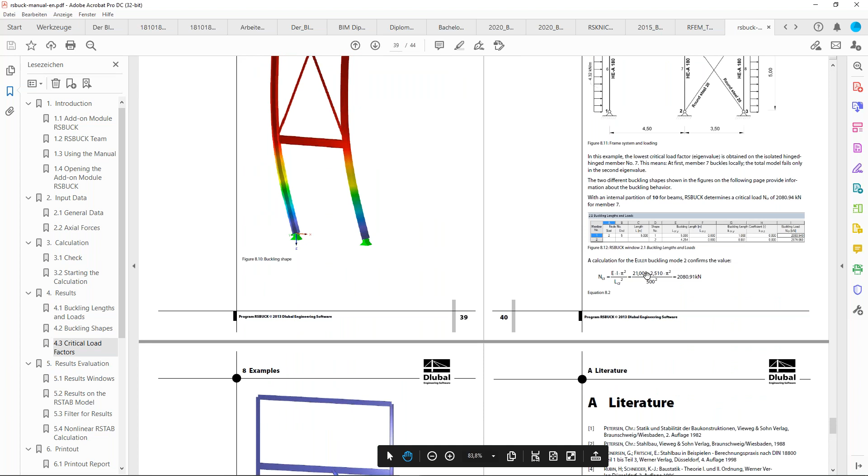2D frame. And because it's a 2D frame, I decide also to do that type of model in 2D XZ, because I just want to activate vertical and horizontal forces in one plane, and also only one moment, in this case, and only vertical and horizontal deformation, and no deformation out of the plane. This is important for that type of model.

You can here decide also to change the project folder. I decide here to take downloads because then I know where it is. You can change it, of course, or you can create a new project. It's up to you. And we don't need any classification of load cases and combinations. This is important for the next example we do one hour later.

My positive orientation of the global z-axis is downward. And especially for you as international attendees, I can recommend you also open these units and decimal places. If we have someone from the American States, you can change here also the units, maybe from lengths to inches, feet, yards, and so on. This is maybe interesting to know.

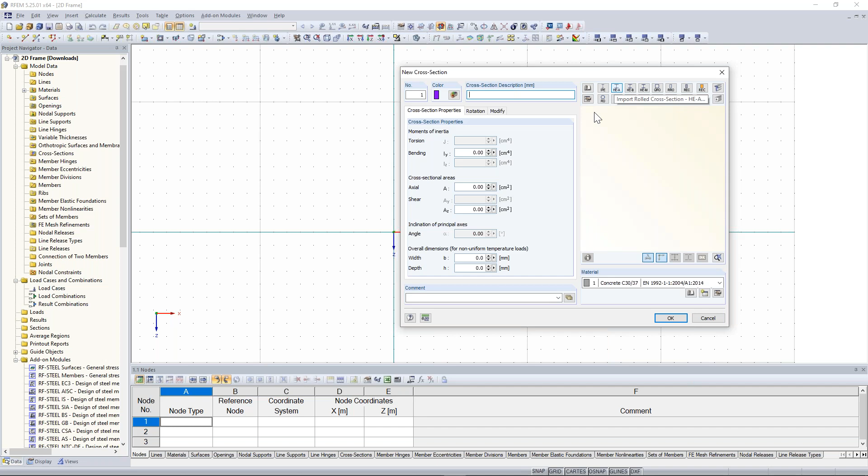Now let us create a new cross section, in this case an HEA 180. It's a very common used profile here in Europe, especially here in Germany. So click here on create new cross section for member start. And here you can see the most used and common used cross sections for steel. So I click here on HEA 180. Material is here, in this case, steel S235.

When somebody doesn't see it, no problem. You can easily add it here in the material or create a new material. For instance, like here, I create a new material, import from my material library. I set my filters for the metal, steel, and according to the standard, in this case, I decide for the Eurocode standard. And yeah, of course, steel S235. What does it mean? We have a yield strength of 23.5 kilonewton per square centimeter.

I click here on OK. Or I can also click here on cancel because my material is already chosen correctly. So I can click here on OK. Again on OK, OK. And now I click here from the beginning.

And I have also to activate snap to grids. Yeah, this wasn't activated now, so I have activated it. And then I draw my column 9 meters high. So the Z coordinate is -9. And with a right click, I close this function.

Okay, now another way of inserting this column, also on the right side, because we have the next column with a distance of 8 meters. So I click here on new single member again. The already created cross-section in RFEM, remember, and then just click here on OK. Within a distance of x equals 8 meters, we create the right column.

Just click here on this grid. And then I want to show you another option of inserting this column, or member in this case: you don't have to set here your column to the height of 9 meters. You can also choose another grid, and vertical to that, you can enter now the length, in this case 9 meters. You see it now on the right window, and then just press the enter or return button and the column will be there.

Okay, nice. Next step is creating here this upper girder. So therefore we create again a new cross section. So click here on new single member, click here again on create new cross section, and click here on IPE 270.

I choose here this one. Materials remains the same. Click here on OK, again on OK. And then draw it from left to the right side. Okay, so upper girder is finished.

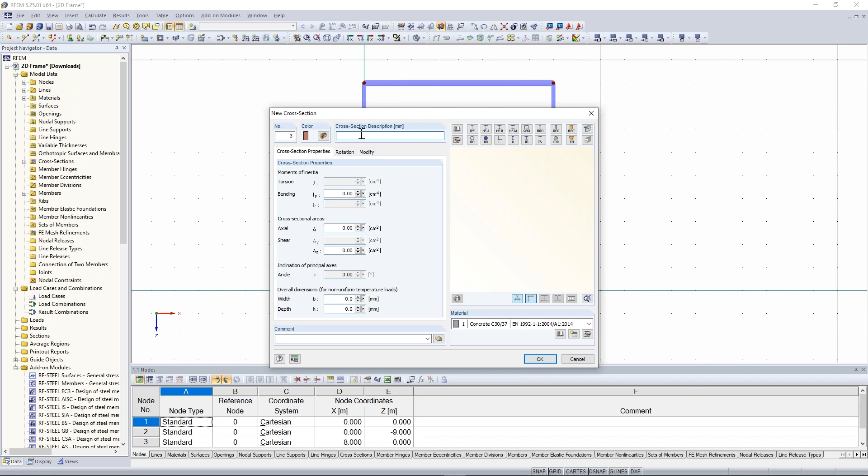And now I can also type here any cross-section description. In this case, I type here IPE 360, and the program recognizes this automatically. The only thing you have to do is change the material from concrete to steel.

I click here on OK. Now you can see here, when you open the tree structure, you can see the created cross-section, IPE 360. And this is now blue. When you see something in the data navigator in blue, this means that this object isn't used so far. In this case, we've created this cross-section, but no member has implemented it yet.

Here in the middle, we want to create this middle girder at the height of 5 meters. So now we divide this member at the height of 5 meters. Right click on the column, go to divide member. Now I have the possibility to divide any member with 3 options: graphically, intermediate nodes, or by distance. In this case, I choose distance.

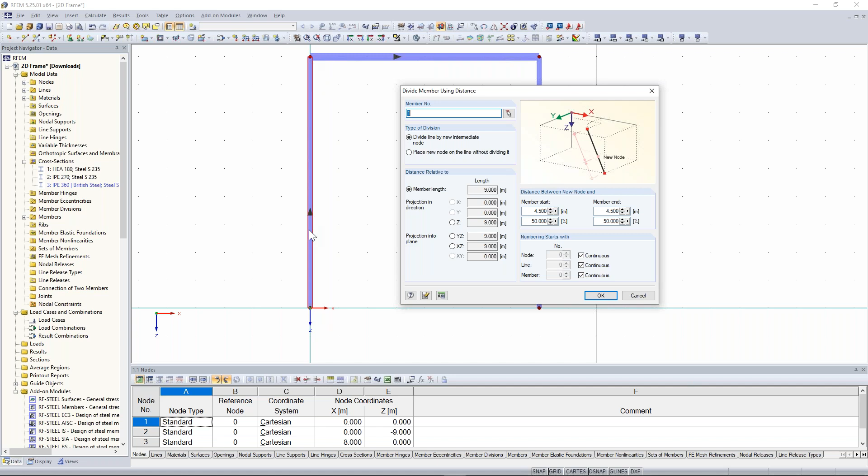Now you see here the different arrows, and these arrows tell me that the starting node is here from down to upwards. And for the upper girder, for example, the starting node is on the left side, and the end node is on the right side. This is important to know where to divide your member.

So in this case, I go from the bottom, 5 meters high. I decide: member start, 5 meters. So it will divide my member here at the height of 5 meters. I click on OK, and this member was divided.

Now, because we have this connection point, we can draw our middle girder here. Again, I do new single member. Because we have already created this new cross section, I only change my member start to IPE 360. I click on OK, draw my middle beam from the left to the right side, perpendicular to my right column, and click OK. This was it. Good.

The next step is creating this vertical column here, and this is a hinge column. Again, I click on this member, right click, and say divide member, graphically in this case. Now I can decide which step I want to have. In this case, I decide 0.5.

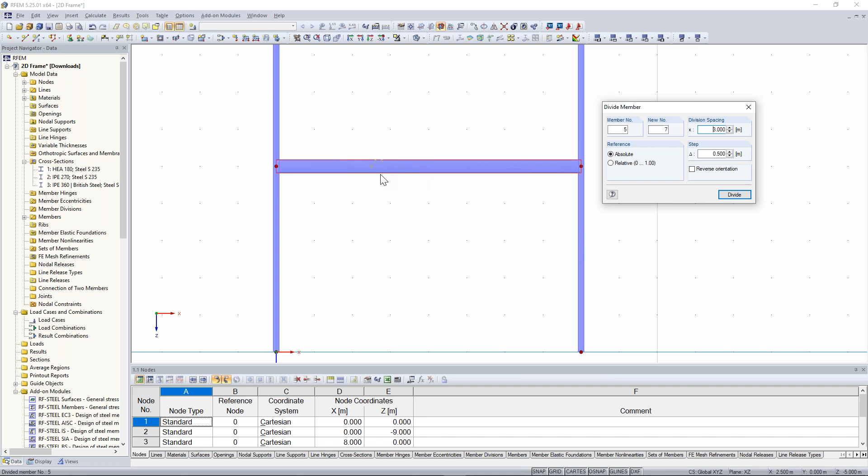Independent of the chosen member, I can divide any member, as you can see here. I can divide this upper beam, the left beam, the right column here, or this one. When I move a little bit along this member, I can see the division spacing change, and we want to divide this at the length of 4.5 meters.

I click here on OK, and this was it. Right click or escape. I close this dialog and I've divided this member and get a new node.

Now my most favorite function of RFEM is copying via drag and drop. Note this and remember it when you work with RFEM — use this function. This makes your life really easier.

Just select it, select the left column. I draw a selection window, in this case from the right to the left upper corner, so everything within this selection is selected. Then press the Control key on your keyboard, hold the left mouse click, drag from the left to the right here to the new node and release, and you have created this new column here.

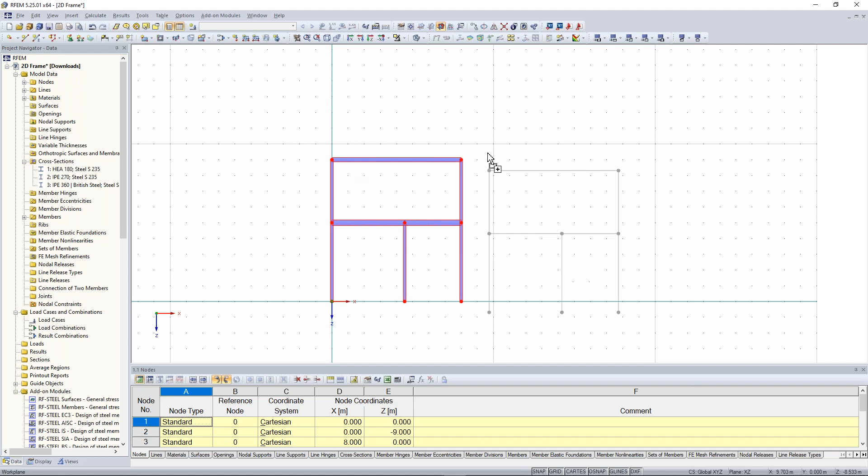Just select everything here — you don't have to do it. Press the Control key, click here on the left corner node, and then just easy, simple copying. It's so easy. It makes your life really easy and makes it fun.

I'll make it undo. Just click the Control key and Z, or here also in the symbol bar, the undo button.

Now the next step is to create the bracing. In order to make it stable and guarantee stability here, because we will add some hinges, I will do this bracing. The bracing has nonlinearities, which means we will activate only tension forces in these member types. First I will create this bracing and then explain it to you afterwards.

In order to create these bracings, we have a very nice function on Tools. At the menu bar, you can call up Tools, then go to Generate Models, Members, because we want to create members. Bracing are members. Bracing in cells.

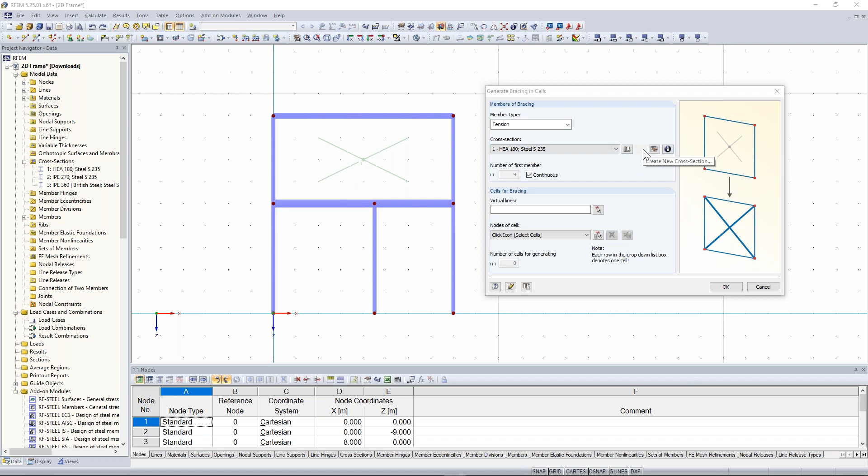Now I have to choose the right cross section. Of course we have just a small diameter of 20 millimeters, so I create a new cross section here. Take this round or import rolled cross section. I do this one, RD20, so 20 millimeters. Click on OK.

Now you see here on the frame this cross, but only for the upper cell or field. This is also only the field I can choose for creating my bracing in cells. The other one at the bottom, I can't choose because they aren't closed.

So in order to close or create a cell, we have the possibility to create a virtual line. Just select virtual line in order to close this right field or right cell. I click on OK, and then we get a new cross.

Now we can create the bracing there. Just select cells, I click here, this cell. I click on OK, again on OK, and we get a new cell. Okay, so much to the modeling.

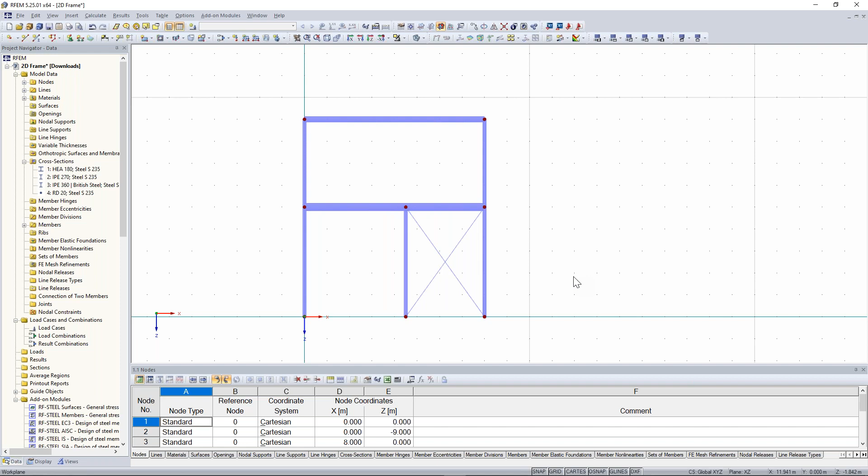Is it possible to get a frame from DXF? Yeah, this is possible. You have different options to import anything. First of all, here import, at the menu bar, File, Import. You can see all supported interfaces, and also the DXF file. And if you want to have it as a background, you can also use guide objects, visual objects, and here background layers, where you can enter any DXF files. Yeah, for example, this is possible.

And the other question was, do you use Ctrl+P or Ctrl+C to copy? I use Ctrl+C to copy. Yeah.

Okay good, let's continue. I guess sometimes, because I noticed it and thought maybe it's only my internet problem, but apparently it's not. Sometimes we don't really see what you're doing, and your voice says things we don't see, so there was someone who noticed a bit of a speed problem. If that happens again, I'll let you know, but so far it doesn't seem to be a huge issue. Okay, sorry for that, I'm really sorry, I don't know how to deal with that. You have to know, in Germany we don't have the fastest internet connections. We are sorry for that, but it doesn't matter - you will get the recording, and in the recording my audio is equal to the sequences you see as videos, so you can watch it afterwards and everything is fine, I think.

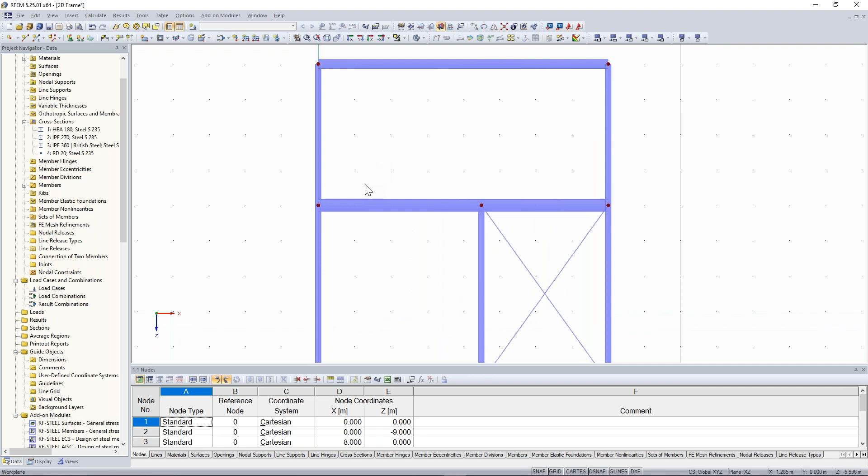Good, so the next step is to create the hinges, the member hinges. In general, we have member hinges because the hinges are supposed to the members. There are also two or three different ways to insert different hinges. First of all is to create a type of a hinge, so double click on the left part of this beam.

And then create here a new member start. Create new hinge at member start.

And here I choose phi y because I want to have a moment hinge, and therefore I don't want to transfer any moments to the other members.

So I have to activate here this restraint, and this will allow me to do or to create a member hinge, and therefore I can't transfer any moments.

When I want to activate any deformation hinge or the deflection hinge, then I have to activate here UX and UZ. And remember, in this case, this hinge refers to the local member axis.

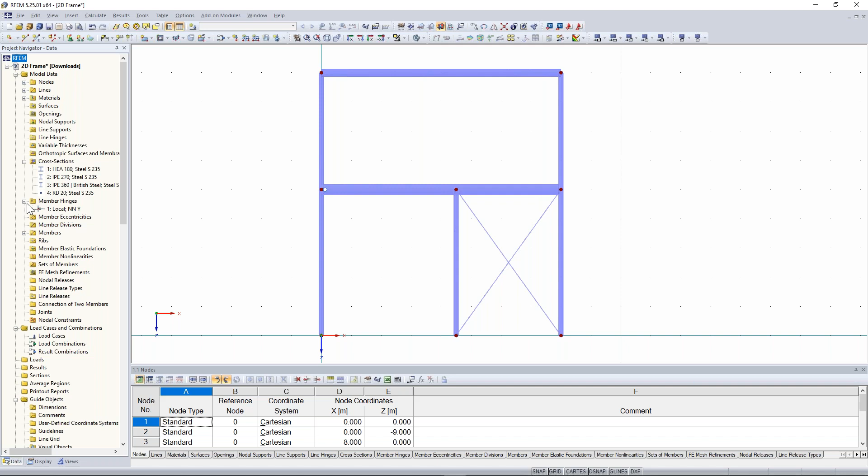In this case, local, and yes, this means no, yes. So we activated this at phi, and now right click and assign graphically to members.

I click on it. Now you see some additional blue nodes, and these blue nodes show you where to enter these hinges.

When I move to the middle of one member, I would add the hinges on both ends. When I move a little bit to the right or to the left side, then I would create this member hinge only on one side of the member.

And in this case, I decide for the right side on the middle girder, and then for the upper side of this column here. And then I click on OK.

And now you see here these member hinges. Everything fine.

Now let's do the nodal supports. Nodal supports, very easy. Just select from the left to the right lower corner, because I only want to select these things which are really in this selection window. So in this case, these 3 nodes.

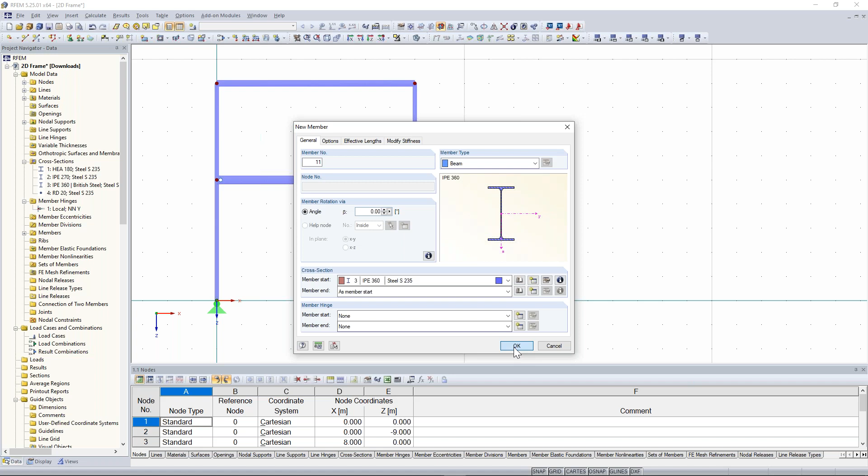Then double click member and I activate it. And this is everything you have to do.

No additional adding here on this side, because this would end to an instability, because you have here too much members, member hinges, and this would lead to a calculation error of the program. So remember, when you have 3 member hinges on one node and also 3 members which connect on one node, then you have done something wrong, because this isn't possible.

And also when you have here maybe any diagonal connection, for example a truss or something like that, and you want to connect this here also with the help of a hinge, then it's very easy. And this one you can delete.

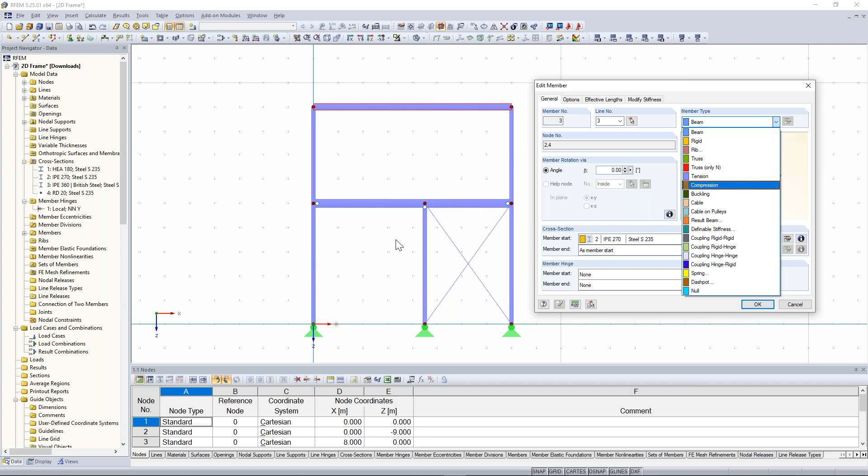Compression member type is, for example, when you have a member which can only carry compression forces, and the same also for tension loads, only tension forces. We will see this after the calculation, because when some of these bracing members get shorter, they get compression forces and won't be considered, while the other one gets longer and will show tension forces.

So remember, when two or more members are connected by the member type beam, all internal forces are transferred from one member to the other.

Next step is adding loads. Before that, we have to create a new load case. In this case, one load case is enough. I go to the symbol bar, click on new load case, enter any name, doesn't matter, test, and deactivate the self-weight, because the self-weight isn't important for the moment—I only want the critical load without consideration of the self-weight. I click on OK.

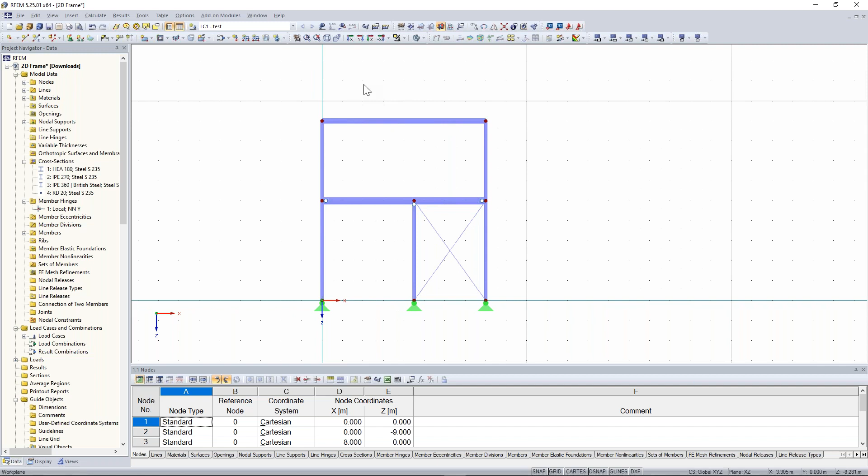Next I add the vertical loads, for the beam on the top and then in the middle. I go to member load—don't mix it up with new line load, we'll come to that later. Remember, member loads are really only for members, like here, for frames, poles, everywhere where you see members, and line load is only when you deal with surfaces.

I click on member, then reference to members, and activate load parameters. In this case I enter 12.767, following the inputs of the RSBUCK manual. The load distribution is uniform, and I relate it to the true member length. Remember, self-weight always relates to the true member length, snow load to the projected member length in the ZP direction.

And when you have any wind loads on an inclined member, you have to refer to the local axis, like this one, ZL. I click on OK, choose the beam on the top, right click to close this function.

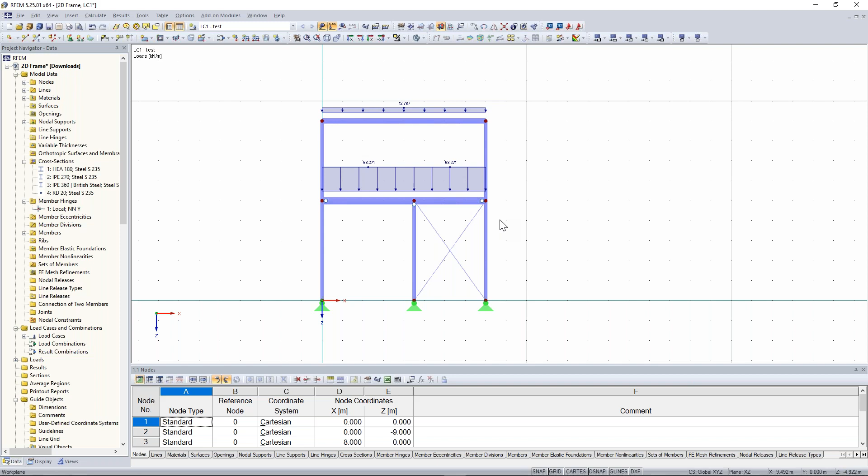Now you can see here two members. In order to summarize two or more members into one, you can use the object set of members. What is a set of members? It's a summary of several members, and it helps you create loads more easily, interpret results more easily, and it's also very helpful for the design.

So how to do that? Just select the lower column or member, press the Control key to add an additional column to your selection, choose the upper column, then right click and go to create set of members. Here you can name it, for example left column, click OK, and now do the same for the right side—right column.

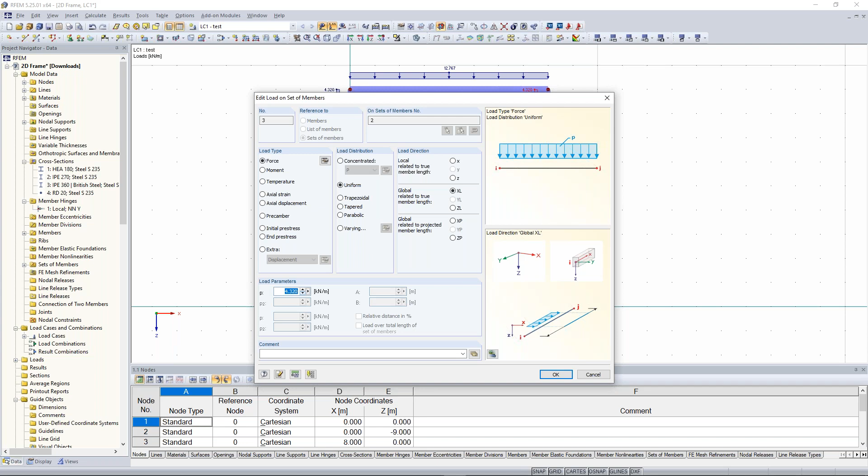So easy. Now we can easily change also the parameter here on the right side, because this parameter isn't right, no problem. We can change everything afterwards. So double click on the right load, change here the parameter from 4 to 2.7. So for the suction side, kilonewton per meter, and now we have changed it.

Good. Now last but not least, the point loads. They come here to the corners and also here to these nodes. So very easy. Select the whole upper beam. Doesn't matter if the beam is also selected. And go to new node load. The program recognizes the selected nodes, so it doesn't matter if the beam is also selected. When you enter here new node load, it will only recognize this node number. Here in this case, just enter the value of 40 kilonewton, click on OK.

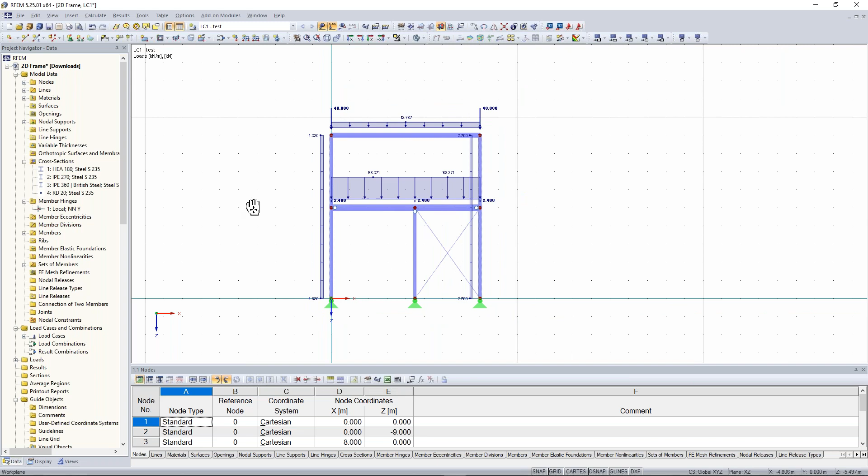And the same we will do for the middle slab beam, 2.4 kilonewton. Okay, this was everything. And now I think we can start calculating it.

Ismail, maybe before we do that, are there maybe any questions which could be important? Right now, I'm pretty sure there aren't any more questions. Okay, very fine. Oh, there's one. Should we assign beam model type for all frame?

Well, that depends, right? Exactly. So it's up to you how you define your structure. You can do it and then assign the member hinges, for example. If you want to have here a hinged connection, then you can add here the hinges. And here, for example, for the bracing, I defined it because I want to have this as an additional stability factor. So I added here also the bracing. I hope the question was answered.

Thank you. Okay, maybe an interesting point is also the dimension. Ismail, do you know the English word for the Maße? Measuring? Measures. I think measuring is good, yeah. You can do also some measuring, yeah.

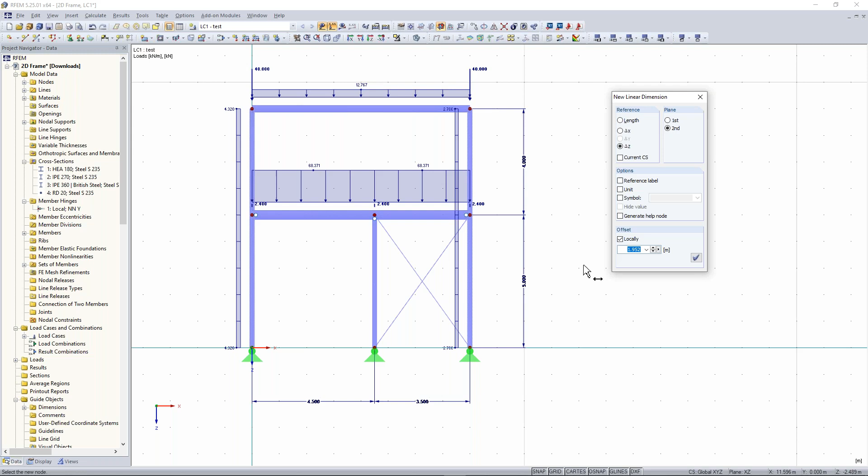Okay, thank you. Or yeah, thank you, Daniel. Good. Then let's calculate it in order to see the results.

I'm pretty curious, so you can click here on show results. Then only this load case will be calculated, or you can also click here on calculate all. But we only have here one load case, so it doesn't matter which button you will press. So I could calculate all, and then take a look to the results.

So first of all, what we are going to see is the deformation. The deformation is shown in these lines. In my opinion, it could be nicer. So I go to the display navigator on the left side, scroll down to the results area, and then go here to deformation, members, and now cross-section colored.

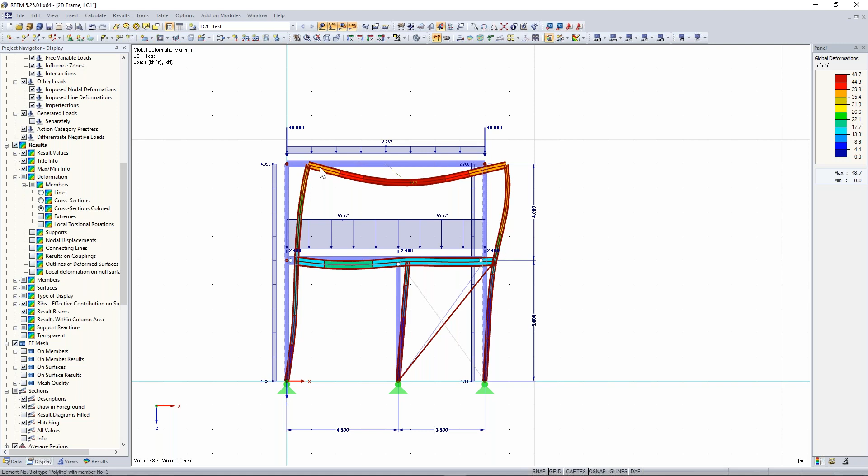And you see here the cross-section colored also with the right panel. The right panel helps you to identify the deformation or the value of the deformation a little bit easier. So red is high deformation, blue nothing. And in order to get rid of this FE lines, you can also go here to type of display, isoband separation lines, and then you see it like here, like that.

Okay, take a look to the deformation. Can you remember what I said about the bracing? In this case, you see this one bracing isn't activated because it was touched with compression forces, and when a member type with tension gets any compression forces, then it will fail and it won't be considered for the next iterations in the calculation. And here you can see also the effect of the tension member very well, because it will be longer and therefore we have also tension forces. Yeah, because the deformation goes a little bit to the right side.

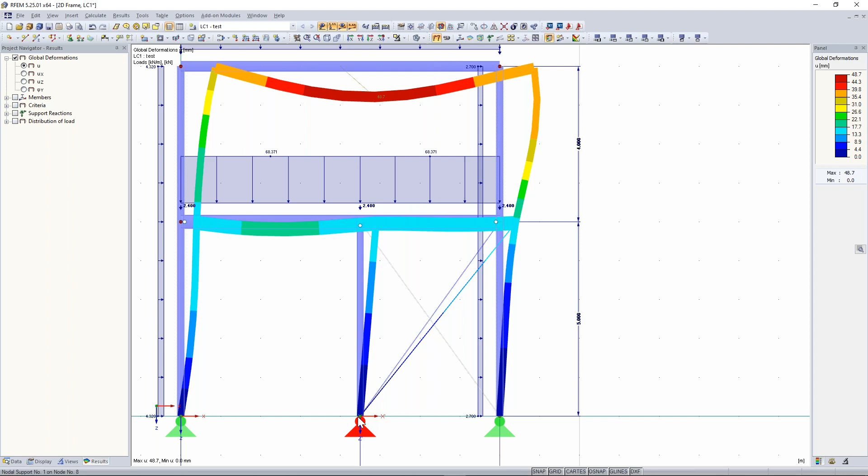It got a little bit longer. So here we will get tension forces and do also some plausibility checks. Can it be possible? We have here this horizontal load, also this vertical load. So is the deformation correct? I would say yes, it is. Also here, it is supported by these columns, this beam here. So I think it's pretty correct.

I can also activate here my table. And what I can also recommend is go to the results and do also here the plausibility checks. So is the sum of loads in X and the sum of loads in Z direction equal to the sum of supports? If you see no deviation, then you have modeled it correct in most cases.

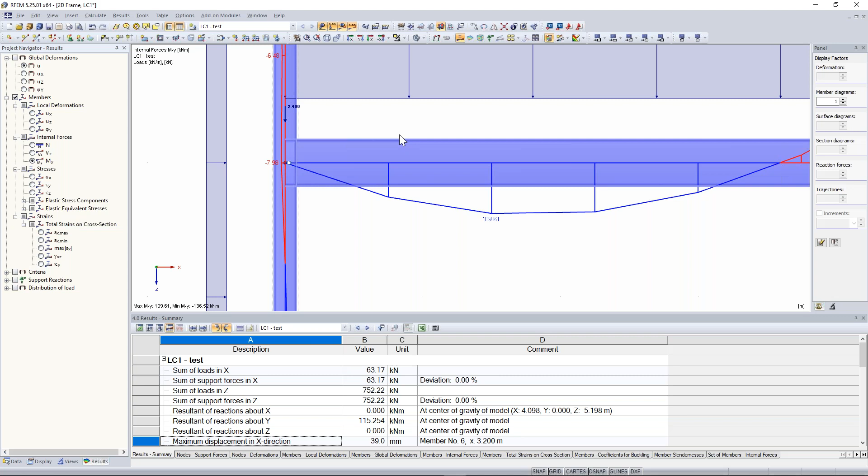We will see some high normal forces. I deactivate maybe the loads. And very interesting, the whole structure is determined by compression forces, except that bracing here - this has tension forces. Because we have here positive normal forces, it's positive, and this is also the reason why it's blue. The other ones are red.

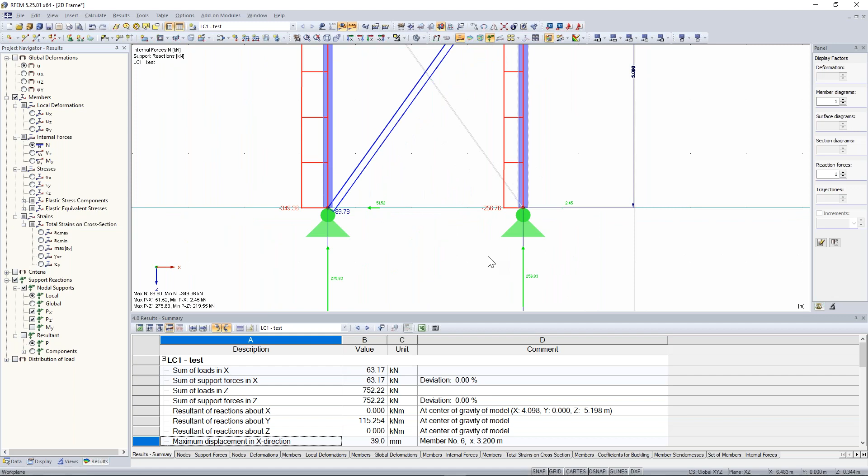The next plausibility check is compare the acting internal forces with the reacting support forces, or support reactions. So activate here the support reactions. Take a look if the vertical support reactions are equal to the normal forces - in this case 219, here 219. On the right side the same. Only in the middle we have a little bit different, because we have here this additional inclined tension force, and this is also the reason why this vertical support force isn't equal to our normal force here. But when you do your components, then it should be the same.

Okay, I think this was everything. Now let's do the stability analysis. Also very interesting - for the design of different application areas like steel, concrete, timber, and so on, you have to use our add-on modules.

You can find the add-on modules again here in the data navigator. Scroll down to add-on modules - here we find a bunch of add-on modules. The other way to find it is here at the menu bar, on add-on modules, you find it here.

Okay, and Daniel - sorry. Go on, I'll ask the question later. Okay, maybe we can do this after the RF stability example, and then we can answer the questions.

Okay, cool, right, good. Click here on RF stability, open this RF stability analysis. And then it will ask you: for more accurate stability analysis results, maybe there's some internal node distribution. I click here on yes.

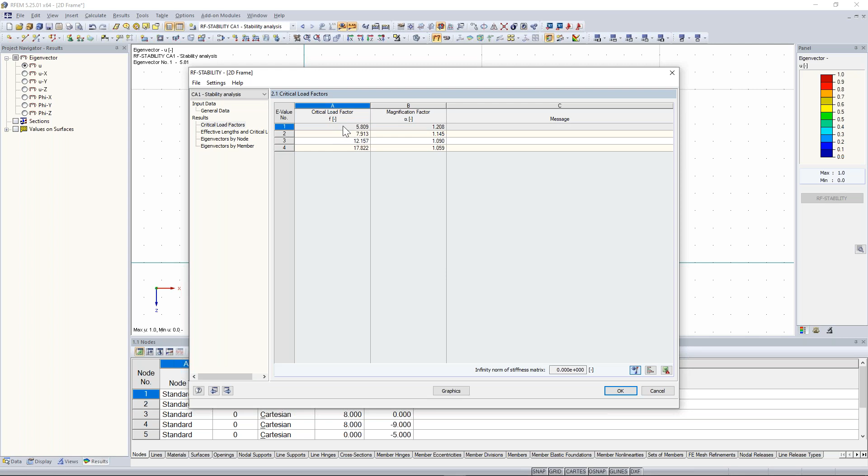So, if I'm right, in Eurocode 3 for steel structures, when you have a critical load factor between 1 and 10, you have to consider the calculation according to the theory of second order.

And the magnification factor is determined to help you find the moment according to the second order theory. So you calculate your moment with the theory of first order, multiply it with that factor, and then you get your moment of second order.

Okay, and here you see also the effective lengths and the critical loads. So now take a look. This is the first eigenform, or the first buckling shape. So here you see, when you would put more load onto your structure...

And you will have the same loads like here. Sorry, this one - you will have the same loads like here. Then the first thing which would fail is this column here. If you would apply a load with a factor of 5.8, then your structure will collapse.

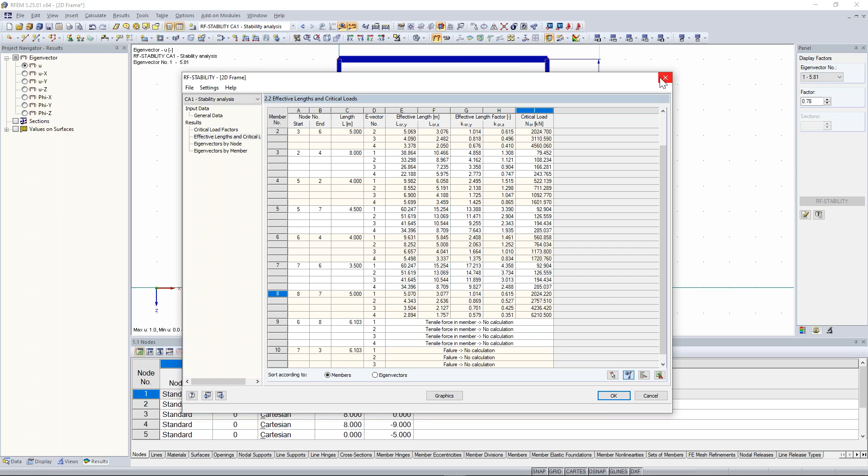I tried to answer the past questions, but now I have a general question saying: is it possible to make a stiffness analysis of members, such as shear stiffness, for example? And if so, how is that made in RFEM?

Maybe if you could briefly explain shear stiffness analysis - I think you mean the different stiffness matrices, because honestly I don't understand the question so well. Same here.

So concerning the shear stiffness, you can consider it here in the calculation parameters, and normally the presettings are that we consider the shear stiffness of members. This is a classical Timoshenko beam. So we activate this shear stiffness additionally, and we get additional deformation by this activation. This is more correct in reality.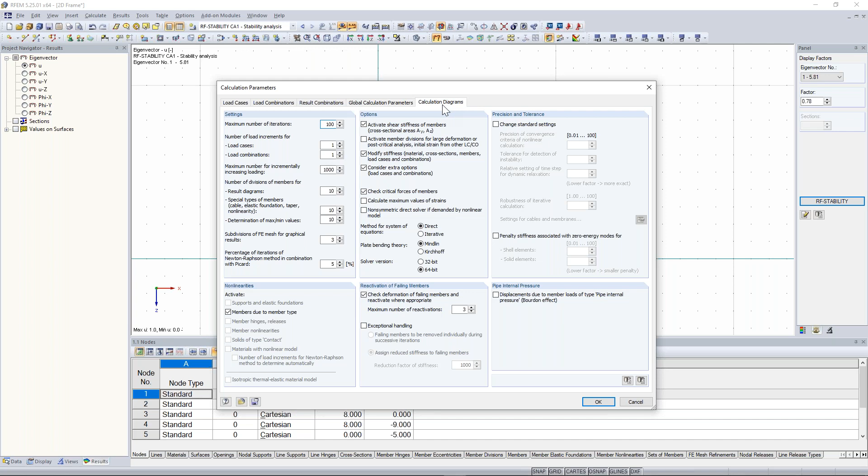Yes, and then it depends on the graph you show and the results. If you want to see certain results, you can always use the different types of exact results that you can see, so you can understand where those values come from.

Exactly. Good, that would be all. Thank you. Very good. Okay, then I would say let's jump to the next example, the modeling and loading of this concrete example.

So, how does it look like? I will show it to you. You will also get the training manual, no problem. So, what do we have here? We have here this concrete building, and we will model it together.

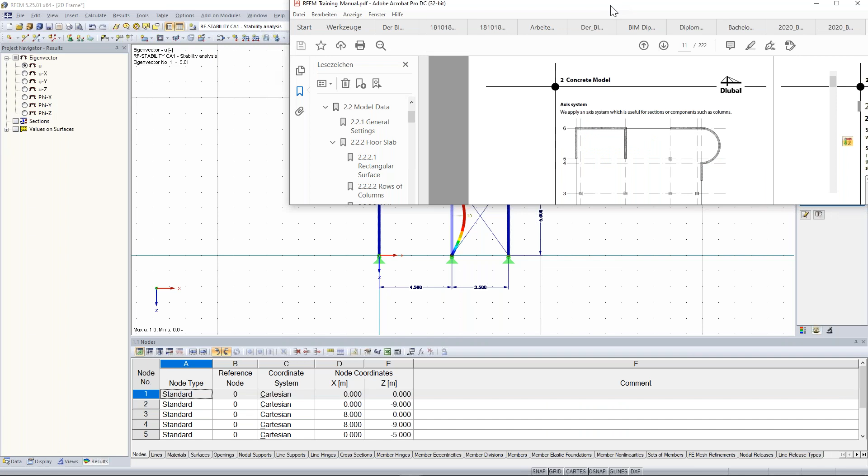Just a moment. Yeah, sorry, before I forgot it, I have prepared some questions because we want also that you learn something in this training. So please answer these questions in order to summarize the learned theory and knowledge. I have prepared 3 questions, so please answer them. And I take a sip of water.

Okay, please let everyone finish this poll or this question. Okay, I close this, show you the results. The question was, how are 2 members connected when they have the member type beam? Of course, bending resistance, so I can transfer shear, normal forces and bending moments to the other beams. Therefore the first answer is correct.

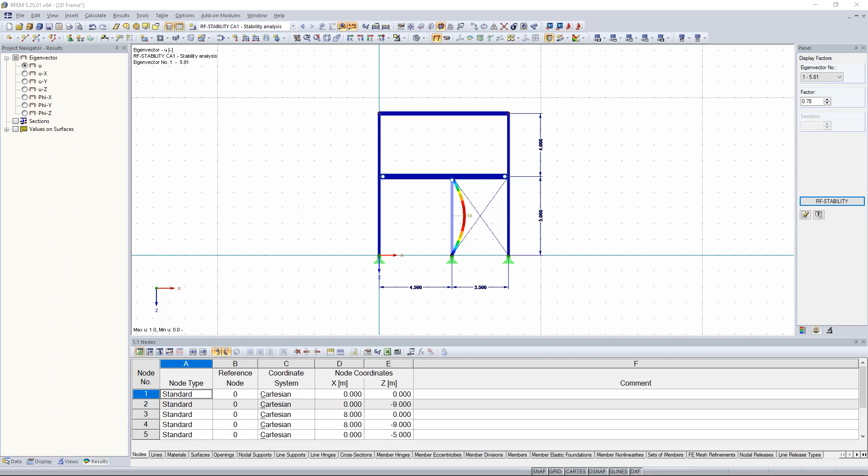Okay, good. So let's continue with the concrete example. So therefore, again, click here on File, click here on New, and this time I decide here for the 3D type of model. Model name, concrete example. Again, choose your folder.

And now I take here the Euro code, and the national annex also a Euro code, so from Europe. And I don't create combinations automatically because I want to show it to you afterwards. Okay, so again, positive orientation of the global z-axis is downward, and with OK we start this project finally.

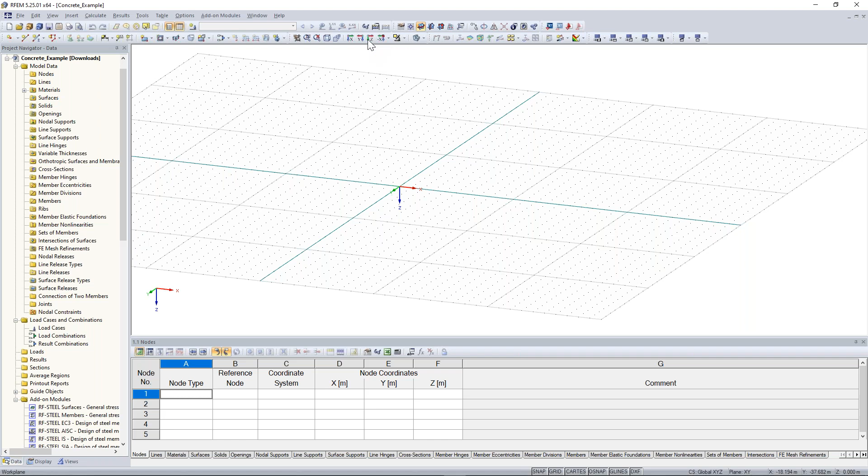Good, so 3D - you can see here the work plane, and the big advantage of RFEM is that we can choose here now the different work planes. In this case I decide for the work plane X, Y, because we want to model now the floor plane, and therefore I change only the view to look to the Z direction. So I go here to the symbol bar, view in Z direction. And now I will create 5 nodes.

The big advantage is that when I know the coordinates of my nodes, I can also do it very easily with the help of the tables. Of course, we can also import any background plans like DXF files or something like that, but in this case we don't have these kind of things. So we decide to do it here manually with the help of the tables, because I want also to show you how to deal with the tables.

And the big advantage is when you already have some information or objects with some coordination or any other kind of information, you can also import these tables into RFEM. There's a big advantage - if you prefer working with Excel or something like that, you can also do it here. Okay, so our first node - just go here to the tables. When you don't see the tables, activate it with the help of the symbol bar, table on/off, or here at view table.

Okay, good. Now go to the nodes tab in the model data area. Click on node type, and with the tab key on your keyboard jump to the next cells. Enter the first node: 0, 0, 0. Then with enter, you will create a new node.

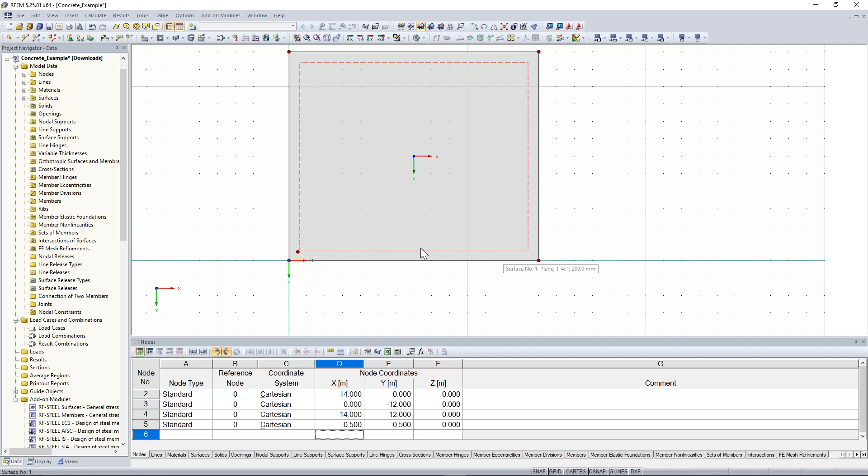The next thing is copying these nodes along the X direction. So right click on the node, click move and copy. Enter the number of copies, click 2. The displacement vector here is 5 meters, so it will copy 5 meters along the X direction.

And then again, move and copy. We need an additional node, so we set the number of copies to 1. Dx is in this case 3 meters. Click OK, and now we have it.

Now we copy all 4 nodes here, 4 meters to the opposite direction of the Y. So right click, move and copy. The Y is minus because it's against the Y direction, 4 meters.

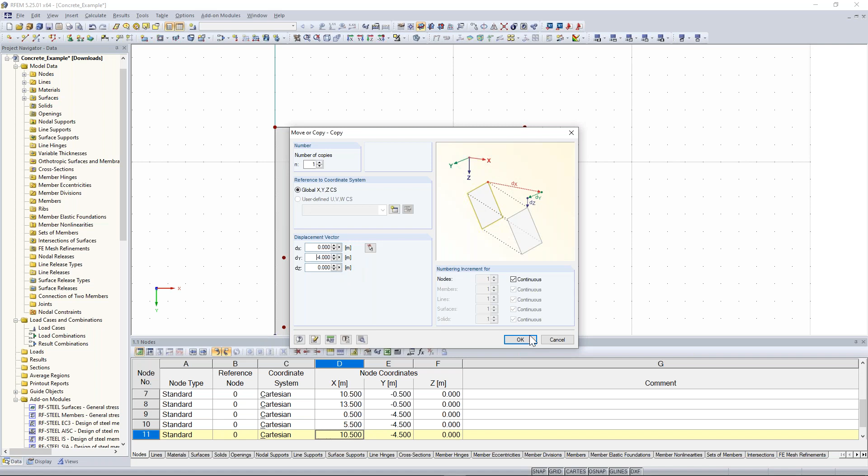The next one is only this one, the second right node. Right click, move and copy, and this is also 4 meters. So finally done. Good, very good.

So the next step is to create a semicircular surface. For that we need the middle point of this line, so we have to create an additional node. How to do that?

We can create a new node with the possibility to create a node between 2 points. I click on that possibility, and choose 2 points, the right corner here, and now I move 4 meters down, so to the Y coordinate -8 along this right line, then click OK because I snap the grid, and this node should be created here in the middle, so 50%, and here also 50%.

We can also set 25% here, it doesn't matter, you can use it how you want, but this function is really helpful. In this case I wanted it in the middle, so I decided to do it with 50%. I click OK, and now we have it here.

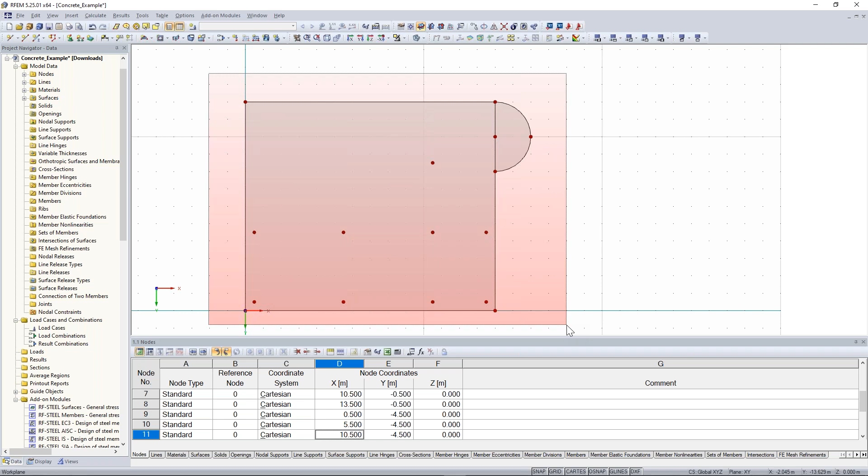Right click, move and copy. Now important, the number of copies is 1, and the displacement vector is against the global Z direction, because we want to do it in the height, minus 3.25 meters. I click on OK. And what did I do wrong? OK, dy, OK.

Now I drag a little bit my work plane. Press the control key and the middle mouse wheel. Now we see it here like that. So pretty good, I would say.

Now we want an opening here, because we want to imagine some stairs, and this is the reason why we want to do an opening here. Remember, openings are only possible when I really have one surface. And now I want to create this opening within these two surfaces, and this is not possible in RFEM. Therefore, I have to create one surface.

So what I'm going to do is delete this line. Just select the line, click delete on your keyboard, and the surface disappears. No problem.

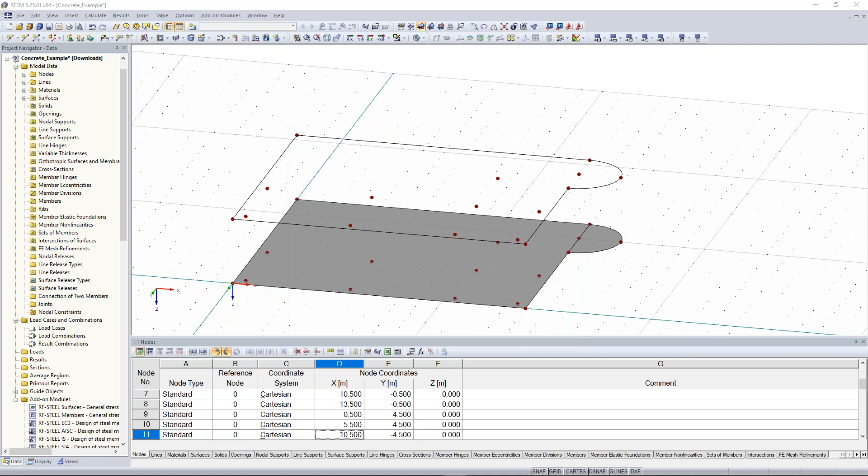By clicking here again in the symbol bar surfaces, click on the arrow, you can select boundary lines in order to create a new surface. Select boundary lines, choose the thickness of 300 millimeters, click on OK, and then you can choose these boundary lines. They are automatically detected and also selected. Click on cancel, and now you have this surface as one surface.

And now we can draw this opening. For openings, just go next to surfaces, to openings. Open with the help of the arrow, new openings. And in this case, we click on circle.

Now we select the center of the circle, this one. And now you see the disadvantage of this graphical input, because I can't set the right circle parameter, the correct radius, because I am in the wrong work plane, not in the same plane. No problem. Go to circle parameter and enter the circle parameter of 1.8, click enter, and this was everything. So easy.

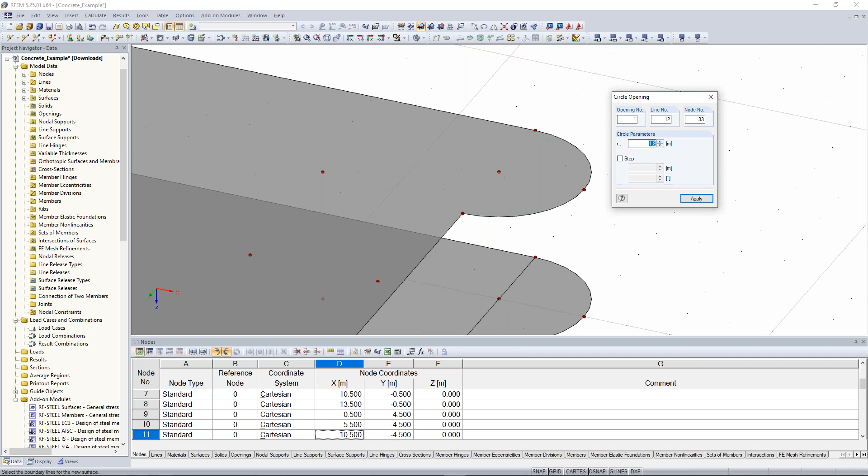Good. Yeah, the next steps are the creation of the walls. How to do that? Remember, every surface needs at least 3 lines as boundary lines for the creation of a surface.

And our walls have 4 lines, so we need additional lines here in order to create our walls. I have to divide my lines to get additional nodes, and these nodes help me afterwards to create my lines vertical to that. Okay, let's do that.

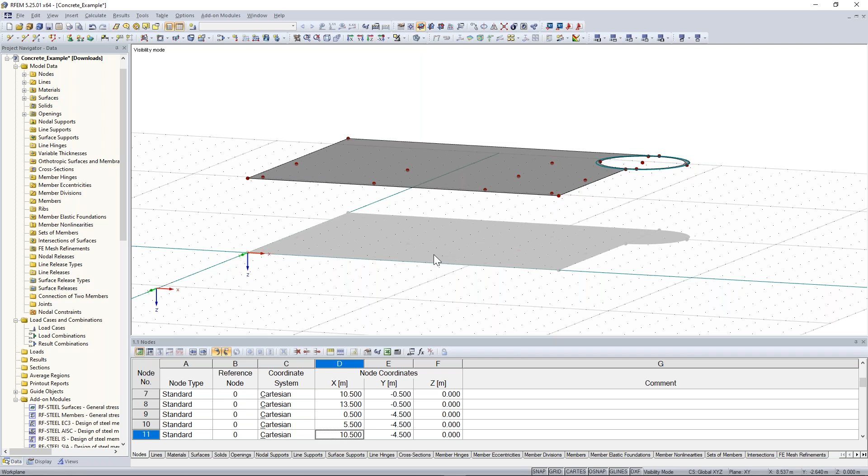First of all, I choose only the first floor, the first slab in this plane. So I select everything. I click here on visibility by selected objects in the symbol bar, and now I only see this slab. Everything else I can't activate or modify. And if I want the hidden objects in the background to disappear, right click on the context menu and deactivate show hidden objects in background, and you will only see this one. Okay, again.

Activate view in Z direction, and now we are going to divide our lines. We see our line direction. You can also change the line direction with the help of reverse line orientation. Then you will see it change from that direction to the other one. I will undo it because I refer to this line orientation.

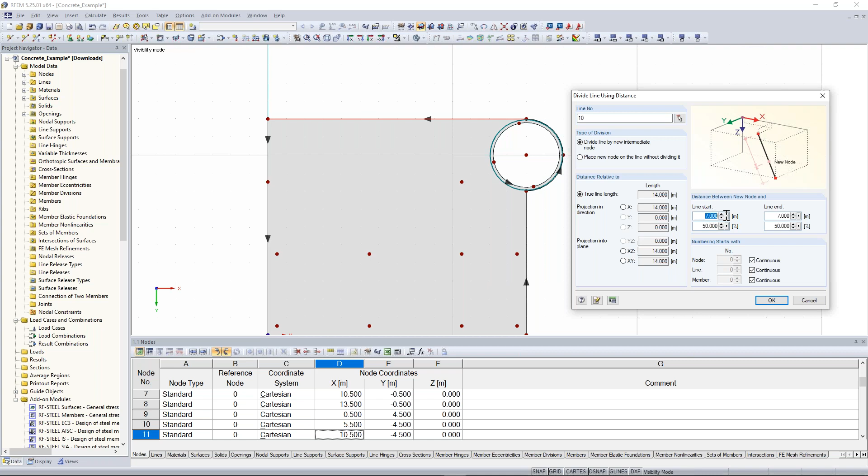So the first division of lines is on the left side. Right click on this line, divide line by distance. I want to divide it from the left corner node, the left upper corner node, 3.5 meters away. So I click on line start, 3.5 meters, click OK. The next division is here, upper line, divide line, also by distance, now from the right side, 3.5. And now here from the beginning, 5.5.

Now let's do the same for the right side. Right click, divide line by distance, 2 meters, from the top, so from the end, 2 meters. Perfect. In order to make it also visible for you, I create again the new linear dimensions.

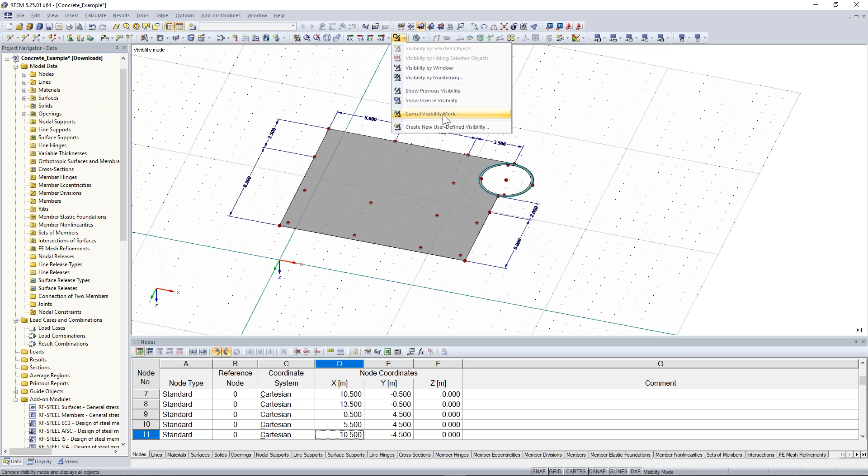So, perfect. Okay, good. Now I want to cancel my visibility mode so that I can see my whole structure again. So I cancel the visibility mode. I see now also the bottom slab. And now I can draw my lines.

Okay, we create a new line. Just create here new line, and we create the new line from the top to the bottom. Right click, and again right click. And now we can easily move and copy these things with the help of our drag and drop function. So just select, press the Control key, select this line, copy it from there to there. And this is what we're going to do for the next nodes we have already divided or created, sorry.

Okay, good. Now we can easily create the walls. For that, again, click here on New Plane Surface, and we are selecting the boundary lines. Select the thickness of 200 millimeters, and select now all lines.

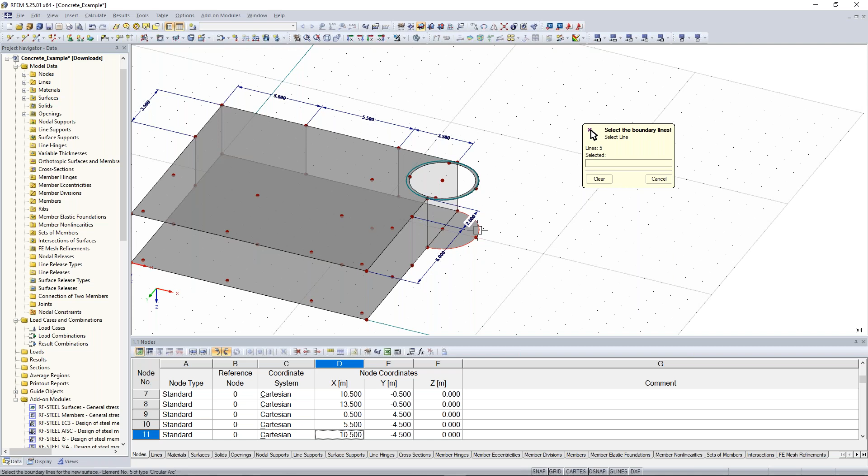I didn't do that because it isn't possible to do plane flats or plane surfaces. And here we have this shape, and therefore we have to use this quadrangle. This is a general four-sided surface, and there it's possible to do this surface.

So I click here on quadrangle, same thickness. I choose here these boundary lines, and with the right click or escape, I cancel the input. Now we add here an additional wall.

Again, I select here this wall, press my Control key, and via drag and drop, I copy it very easily from there to there. Ready. Good.

Okay, the next step are the columns. The columns are done with different cross sections, and therefore I create a new cross section and a new single member. I click here on New Single Member and create a new cross section.

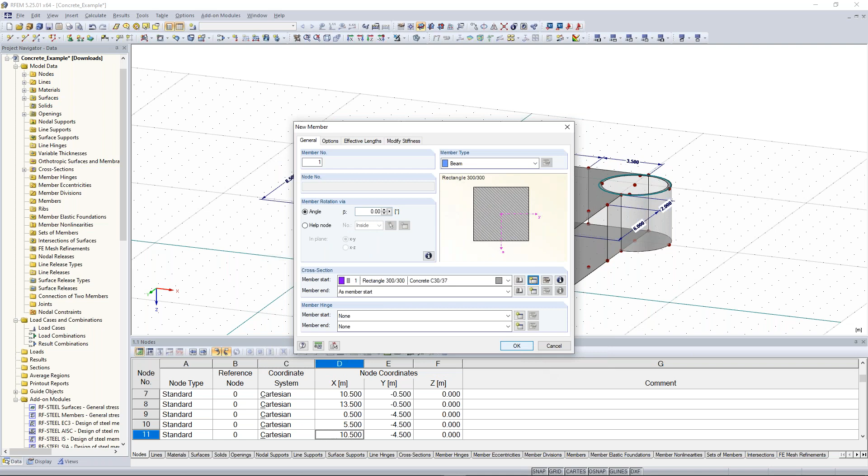This is also the reason why we have created so much nodes before, because now we can easily create here this member or this column. Now again, via drag and drop—this is absolutely my favorite function—I can easily copy it from one node to the other.

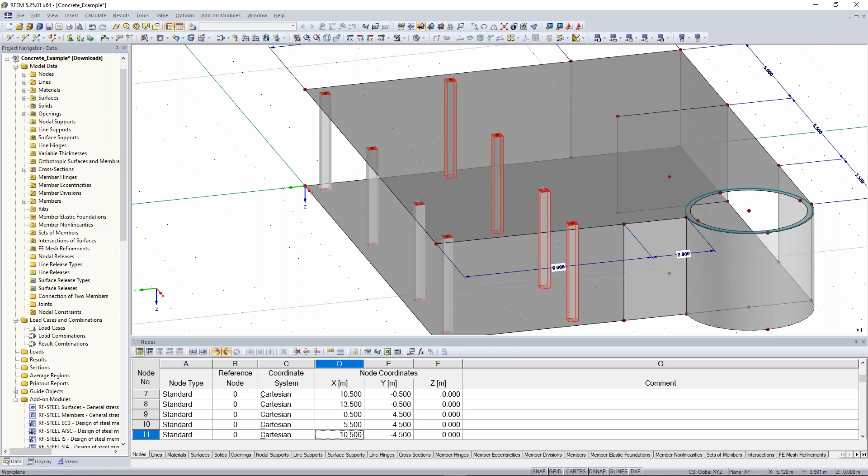Now I rotate a little bit my structure in order to select all 4 columns at once. Right click, move and copy. Now I can also select the displacement vector with the help of this nodes. Click here this node and this node. 4 meters, zack. And the same I copy here to that. Okay, fine.

I think this was almost everything. Now we will create the window on this side here. Here we want to create a window, so a new additional opening. And when you will do that, you will see it isn't so easy because now we are not in the same working plane. So you don't have to do it with me now. When you click here on the rectangle and when you want to work here, it's not possible.

Even if you change here the work plane to the XZ direction, you can't snap here any grids and this wouldn't work. So therefore, we have the possibility to change this origin of our grid and work plane. Here in the symbol bar, we find the set origin of grid and work plane. Click here on OK, and let's choose here this corner.

Now we will create new nodes, and now you can refer to the grid origin or to the current coordinate system. In this case, I refer to the grid origin. This is also the reason why the coordinates get this apostrophe here at X, Y, and Z. Current coordinate system would be that coordinate system before. But in this case, grid origin, and I enter here the new coordinates.

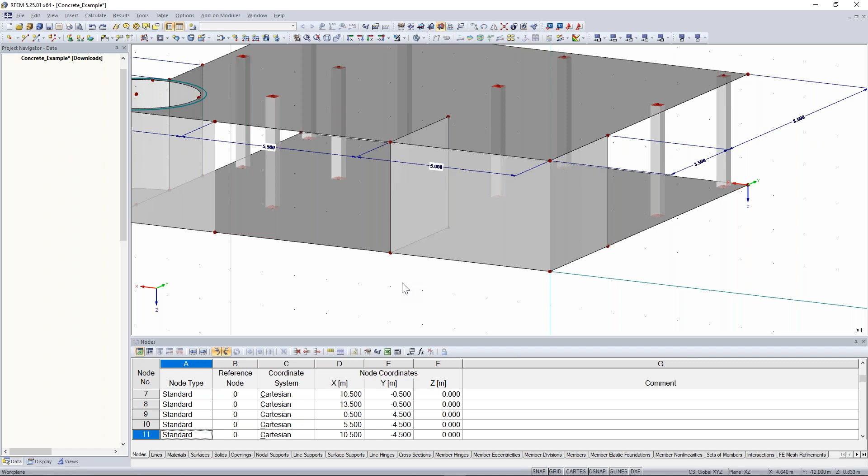Again. 1.5, 0, minus 1. Okay, and the coordinate X should be minus 2.5 here, definitely. And here, yeah, it should be 5. Okay, doesn't matter, I think.

Now I know the reason. I am really sorry, now I know the reason. Yeah, I modeled this wall too short. I'm sorry for that, but I think it's good that this happens to me because now I can show you how you can repair these things.

Yeah, so I make this thing undo, this last node. I leave this node because this line should be 5.5 meters. So no problem, really no problem. Look how easy it's to change this. So I will select these nodes.

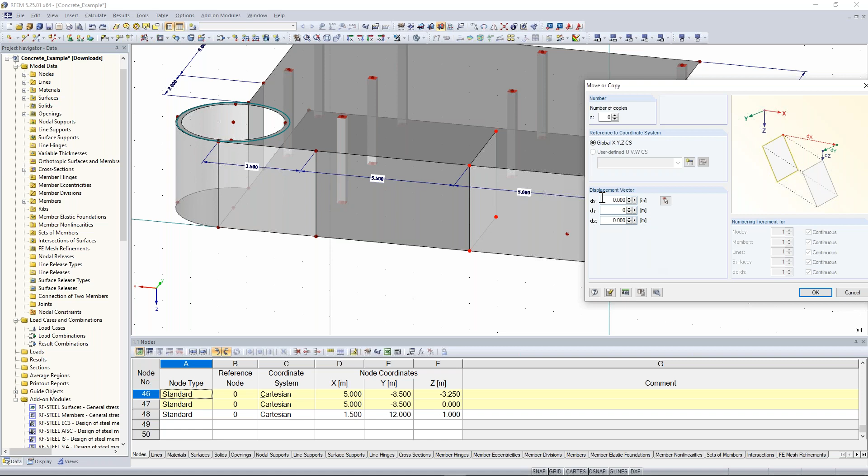Create, say, okay, move and copy. Enter only here so I don't want any copy, so only the movement, and all nodes should move 0.5 meters along the positive X direction, so 0.5. I click on OK. Zack.

And this was everything. Now I can create the node again. I'm really sorry for that, but I think now you can see how it's easy also when you do something wrong, how you can change it afterwards. So now coordinate is 50 minus 2.5. I click on apply and now I have it. Fine, absolutely fine. And now I can also very easily create this rectangle, this opening, and now I have it. Perfect.

Good. So what is the next step? Maybe before we do the next step, Ismail, are there any questions?

No, but I have a suggestion, if you allow me to say it. Just in case you don't want to create new nodes, I personally do it using the display options function. When you choose not to display surfaces, you could actually select nodes and points in that surface. So if you just hide the surfaces, when you click there, you wouldn't select the surface, and then add your rectangle and then make the surfaces appear again. That would be an alternative. But I think the good thing about RFEM is there's always at least 3 or 4 different ways to do the same thing. Yes, you're completely right, and I agree also with you. There are so many possibilities how to do that in different ways. So choose your favorite way how you create and model your structures. It's up to you. We offer you different options to do that. So choose your favorite one.

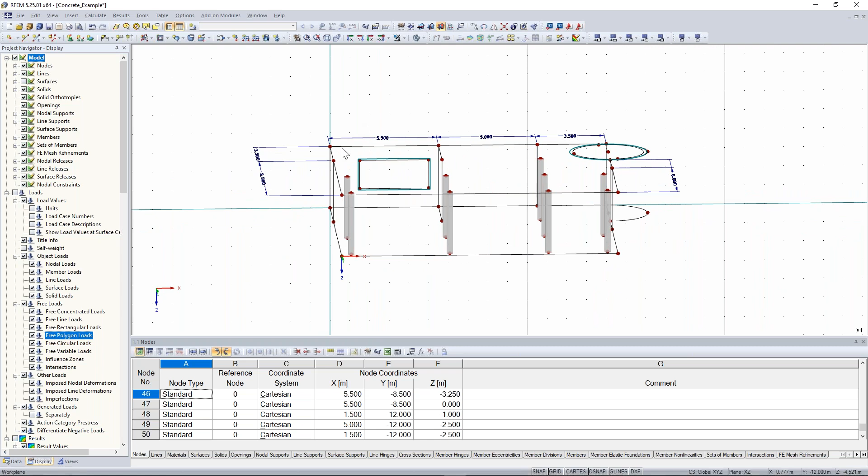And also maybe another tip: when you don't want to snap any grid points, just deactivate snap the grid, and then you can only snap these points or nodes of the structure. This will make this workflow more fluent. This is also a very nice tip and hint. So you see, you will learn a lot of things here.

Okay, good. And the next point, maybe we can leave it like that now, is to create a new line, because this is also an important point to know: every member in RFEM includes lines, but not every line includes members. Let me explain it here. When I select this column and right click, I see line and member. When I click on member, then edit, I see that the member has included the line 30. The same with the line here, edit, member. Here the line, you see that the line includes the member.

And we do it now the same way. So when you have a line or something like that, and you want to transform the line into a member, this is possible. Now we do that in this case. We create a line because we want to do now a downstand beam. So I don't know what that is, I have to—doesn't matter. I create this line from that part to that, and then again to this column, right click, and now I have here this node. I change maybe the working plane again to my YX plane, and also my grid origin to my set of origin.

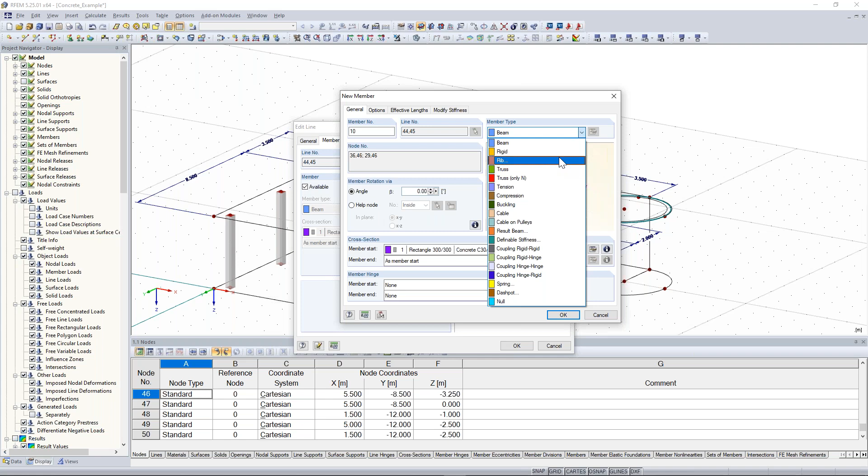Okay. And now you see here this line, and then select these two lines, right click, edit line, and then press here available, and you can create a new cross section here. And now we will create a new cross section. And now this is also very important: when doing downstand beams, please always use the member type Rib. Downstand beams in concrete structures, please always use Rib, also when you have these T-beams with an integrated surface, then please use Rib. Okay, so before we do some presettings or some settings, we create our cross section of our downstand beam.

This cross section will get—let me take a close look. It's also rectangular, width 200 millimeters and height 150 millimeters. I click on OK. You can leave it like that. Okay, and now edit member type.

And here you can see some settings. First of all, the position and alignment of our downstand beam. Of course, the upper edge, the top edge, should be the same as the bottom edge of our slab. Again, the top edge of our downstand beam should match the bottom edge of the slab, so in this case, on the plus side of the surface.

And what does Rib mean? For Ribs, the internal forces are determined according to the requirements of concrete design. The stiffness of a Rib member results from the member height, what we have here, and the surface thickness due to the effective widths, which we determine now with this integration width. So the internal forces of a Rib member include the member forces and the internal forces of the surface that are integrated from widths B1 and B2. This is like in the study of concrete structures, similar to what you learn there.

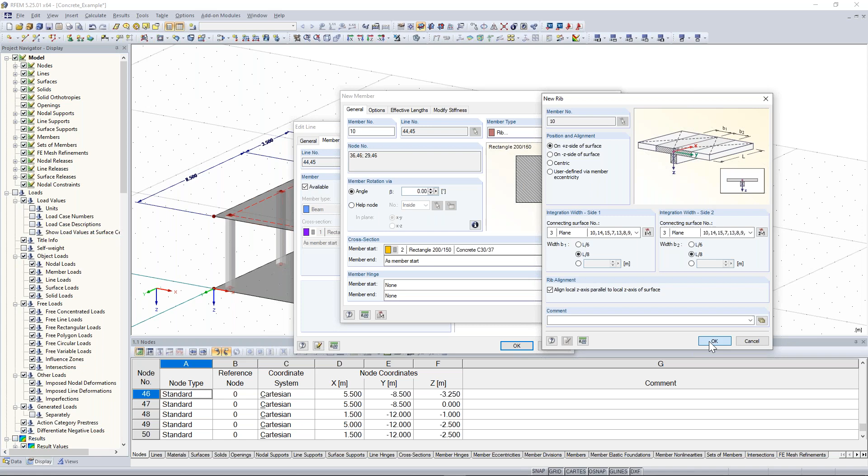Then I click OK again. Now we see it, because we had to choose our surface. The display navigator jumped back to lines and also to surfaces as activated.

In order to make it a bit more understandable what we do here, we have now a kind of eccentricity, because the upper edge of our beam is equal to the lower edge of our surface. To make it more visible, go to the display navigator, rendering, model, solid model, surfaces, and activate the field inclusive thickness. And then maybe this would be better with the edges. Now you see, it's absolutely correctly defined. Okay, good.

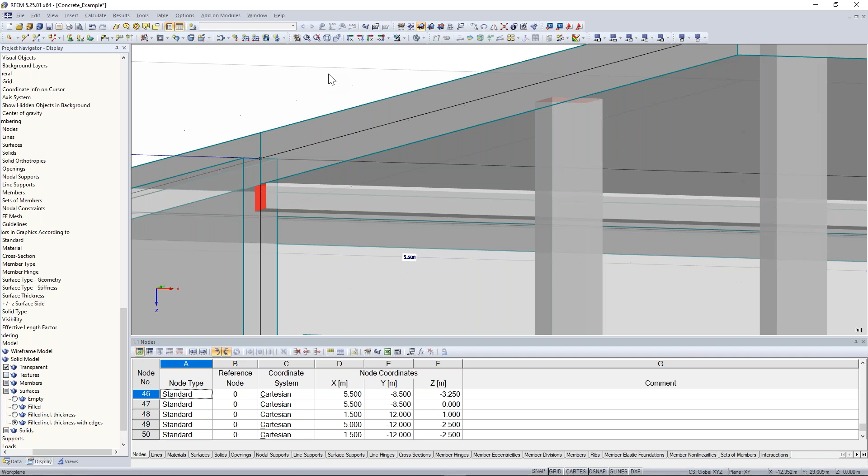Okay, next step: definition of supports. On the left side, we have a kind of line support. So I select these lines because there we have a kind of line or beam foundation. Right click, and I say edit line, because also from a line, a single node, or surface, I can create supports. Go to the register support and say available, and we create a new kind of line support. We only want to have the vertical forces.

Therefore, deactivate the horizontal conditions and only activate the vertical support conditions. I click on OK, and we see here these vertical line supports.

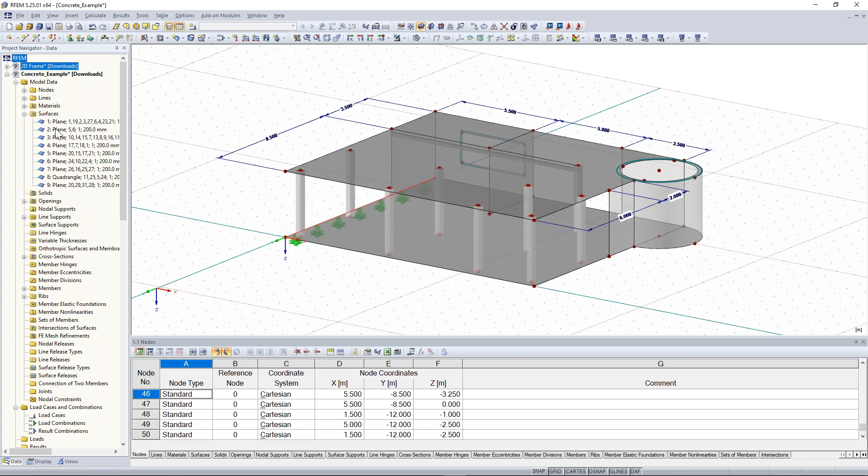And now the same for the surface supports. So we select our surfaces, now with the help of our data navigator, because this navigator enables a very good overview of all existing objects. So I go to surfaces, open the tree here, and I know the first two surfaces, or in this case the first two planes, are the planes at the bottom. With the pressed Control key, I add another plane or surface to my selection. Right click, click Edit, and now you see surface number 1 and 2 are selected.

Then go to support/elastic foundation, say support available, and now you see the spring constants you can enter for that. We want to do it not rigid, so we don't activate that, we only enter spring constants. So first, we change the units from kilonewton to meganewton, units and decimal places. I click on that and change it from kilonewton to meganewton, okay.

And now I enter the spring constants, 10 meganewton, 10. I jump from cell to cell with the tab key on my keyboard. 50, and also 50. We want to add a nonlinearity, so we select failure if negative contact stress in Z. This option corresponds to failure under tension, that is, if the slab is lifting, going upwards, no more support is provided. Click OK, again OK, and we see this surface support.

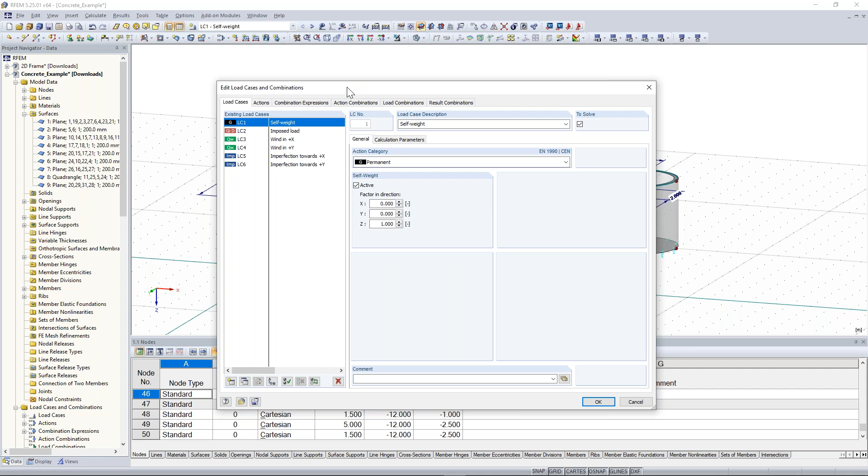Now you see here additional tabs like actions, combination expressions, action combinations, and so on. Now we go from every tab to the other. Actions - here we see the different actions like imposed, wind. We see here also acting alternatively, simultaneously, differently. Alternatively means that both load cases are excluding each other, so load case 3 with load case 4 can't be combined together. Simultaneously means that they can be combined together.

Combination expressions. Now you can see different combination expressions like the ultimate limit state and also the serviceability. For our easy example, we don't need these serviceability states, so I will delete them. Only ultimate limit state is interesting for me. And there I can say, okay, imperfection load cases, because I have also some imperfections.

I can set them in a different way. I can say, okay, subject to specific load cases, and say please only with load cases, imperfection towards plus X, with the wind in plus X, because then it is more critical. So I say, okay, only with load cases with plus X, I click on OK, and here the same with plus Y, I click on OK.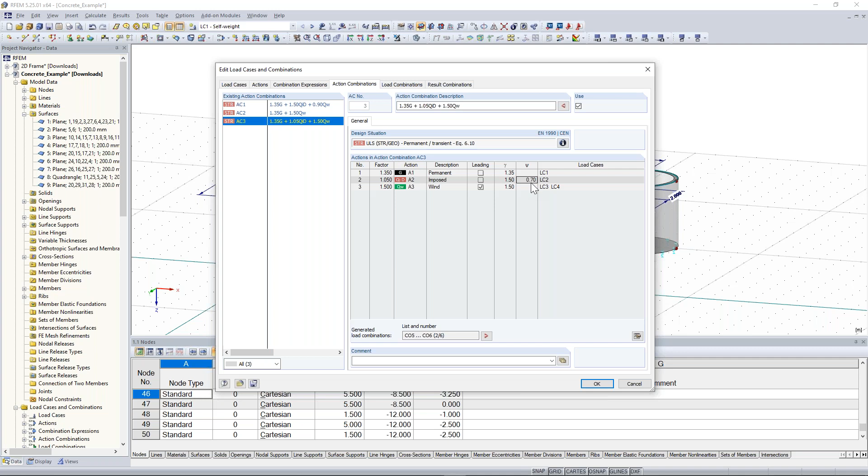Jump to the action combinations. There we can see it. We have imposed and wind loads, and the difference is that we have one leading action. In this case, this is the wind here, so with a full partial factor of 1.5, and every other action has the partial factor of 1.5, but also the combination factor of 0.7, in this case for the imposed loads.

Okay, to the load combinations. What are load combinations? The load combinations are treated as one load case, which is calculated according to the second order analysis you will find here under the calculation parameters. And this load combination is a combination of all load cases under consideration of the partial and combination factors into one bigger load case.

So for example, we have here combination 6. There we have load case 1, load case 2, load case 4, and so on. And the leading one is here, in this case the wind. And therefore we have here for the imposed load the partial factor of 1.5 times 0.7 equals 1.05. Okay, you can see it here also, and so on.

Okay, and now let's come to the result combinations. What are result combinations? In a result combination, the maximum and minimum values of internal forces, deformations, support forces, and so on are determined. So the model is not recalculated. It sums all available, in this case load combinations, into one result combination, and you can see the maximum and minimum of results.

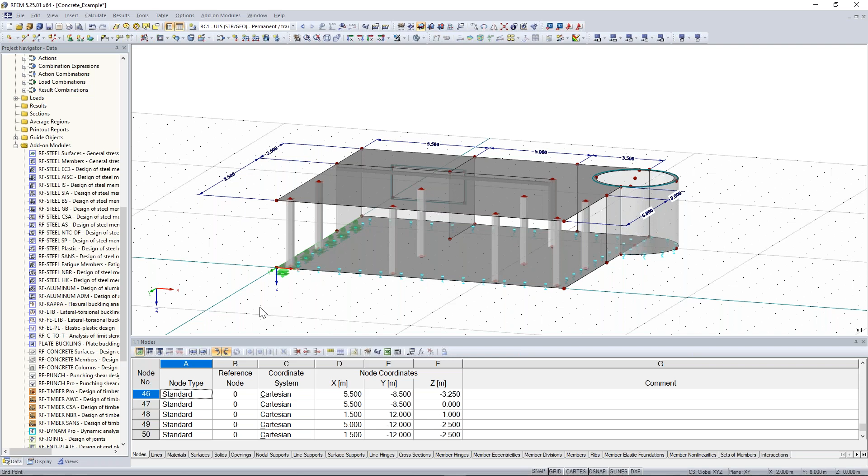Back to the questions concerning concrete structures: all the reinforced concrete design you do with our add-on modules, but this will be part of our third student training. Okay, only 10 minutes left, so I'll go a little faster now.

I'm sorry for that. Now we have to apply our loads. We've created our load cases, and now we have to put them on our structure. I'll do it a bit fast, sorry, I don't want to bother you by taking too long.

First, imposed loads. Very easy, just select the surfaces here, choose new surface load, and you see the surfaces were added. Magnitude is, I hope I'm right, 5 kilonewton per square meter. Click OK.

The same with the other slab. I click enter to repeat the command. Magnitude is 2 in this case. I choose the upper slab, and now let's do this for the wind.

I choose here, for the pressure side, the surface, and there I have 0.4 kilonewton per square meter, but important, it's related to the true area, not global.

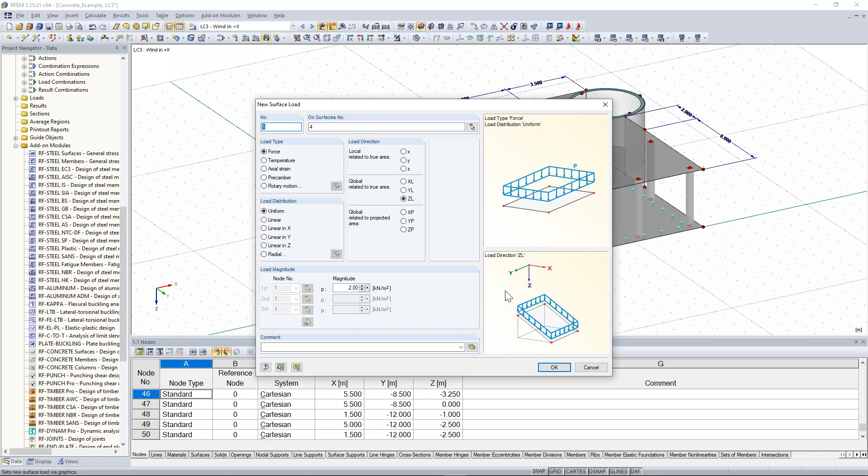Now the difference between member and line loads: when I have line loads, I activate the loads on lines, not on members, but the load acts on the surface. So, create new line load. In this case I have 0.65.

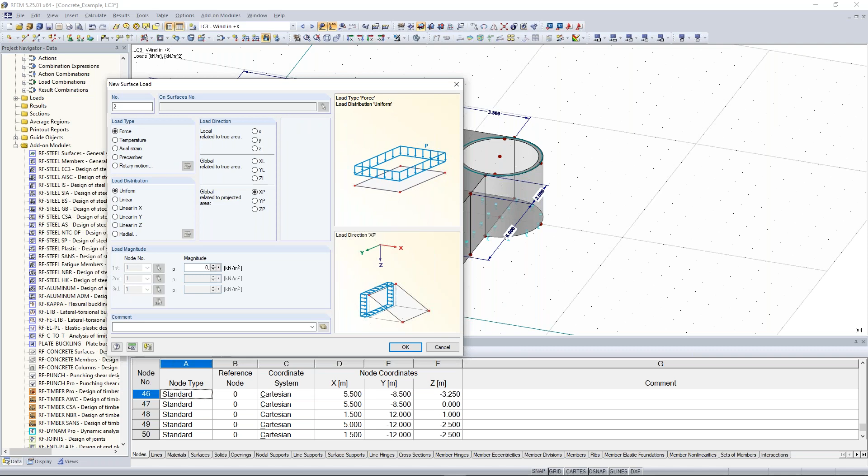And for the suction side, I do the same. So I create here new surface load. But in this case, for the projected area, because we have here this semicircular surface, suction side a little bit lower, 0.25. And here again, line loads, 0.41.

Good, so I jump to the next load case. Just click here on that arrow, next load case. Now from the other side, choose the surface load, projected area. In this case, to the global related Y direction, I click on OK. And for these lines, we do the same, 0.65.

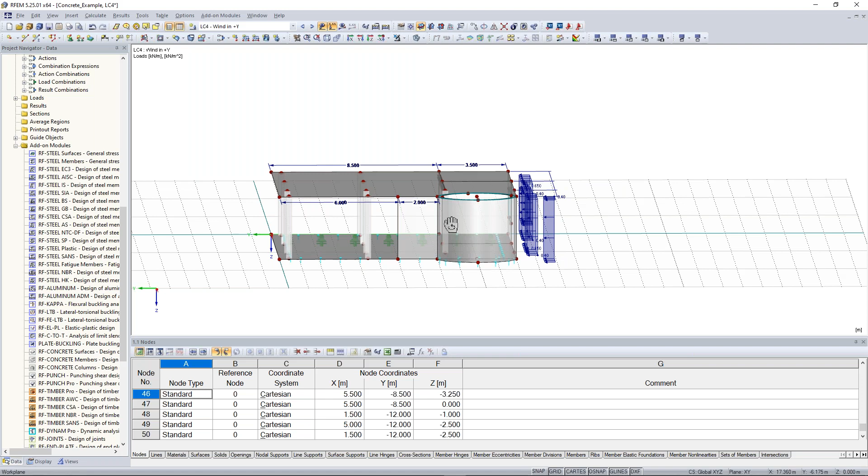Okay, now I will show you another way with the help of the tables. You can also create line loads, very easy. Jump here to loads, choose here the right load case, and now click here on line loads. Choose the right lines, this one and this one. Click on OK. Force uniform load direction is YL, and the load parameter is in this case 0.41. And you have it here.

Very good. Now, last but not least, the imperfections. Also very easily done, because now we can also play with the view navigator a little bit. Personally, one of my favorite things in RFEM is the view navigator. I will show only the columns.

So I go here to the view, I go to members, cross section, I activate them. And now I choose only the cross sections with a cross section of 300 by 300. So very good, I see here the member direction.

And now I go here to insert, loads, imperfections, and I say okay, graphically. I go here to members. Now, to which axis? In this case, Z-axis, I hope it's correct. And I enter here only the inclination, so no precamber, according to Eurocode 2. Here we see the equivalent loads of this inclination.

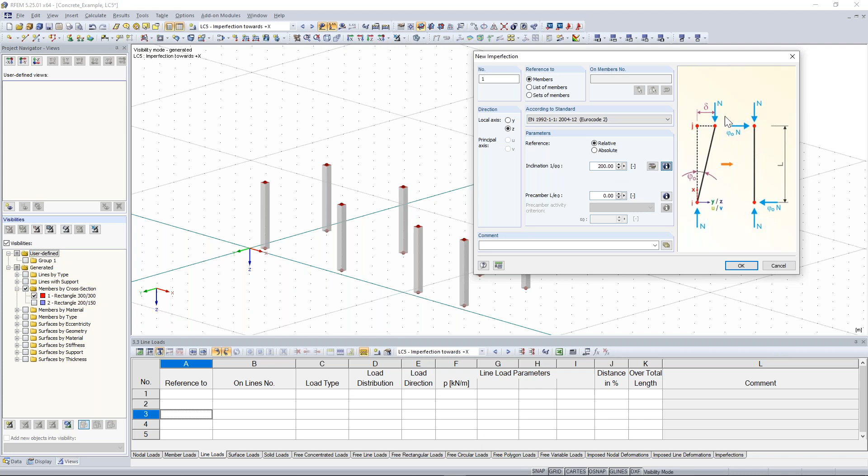I click on OK. I select all columns here, and I hope they are considered correctly. So I change maybe a little bit the display mode in order to see it a little bit better. So imperfections toward X, and they are assigned correctly, showing in the right direction.

And the same we do with the Y direction. So again, maybe right click on one of the members, we can see also the local axis of our member. And then we see, okay, when we align or when we are referring to the Y direction, to the local Y direction, then the imperfections are done in the Y direction.

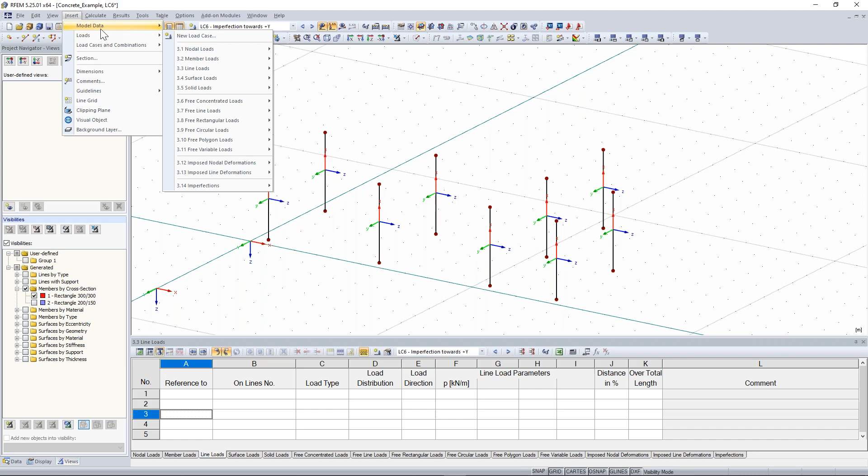So we create a new load, imperfections, graphically, Y direction, and choose all columns, and then jump back, cancel our visibility mode, and change also maybe our model, and then we can calculate it.

Okay, let's do the calculation. Just press here, calculate all, then all load cases, result combinations, and load combinations will calculate. So I will do that.

And there you see maybe, okay, load case 4, the wind loads, where we have some problems with the convergence, because we set here non-linear surface supports, and therefore it is unstable in this load case. But normally this load case isn't alone, and it's always combined with the self-weight, so it doesn't appear in this case. So let's take a look at this load case.

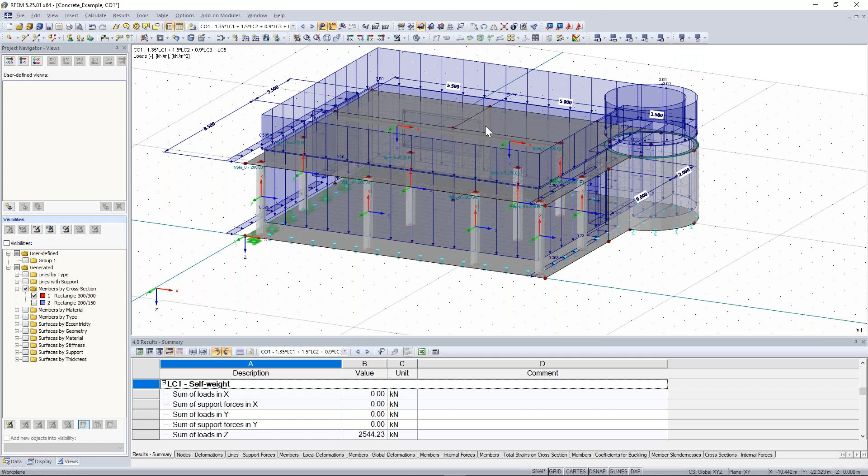Here where you see the loads and maybe the results, and here you see the deformation, the internal forces of the members, and also the surface results like bending moments, normal forces in the walls here, for example, and also the stresses, strains, contact stresses, which is very important for your bottom foundation here, and also your support reactions here, the line.

If you want maybe an integrated or a distributed line reaction, go here to display, go to results, and then to support reactions, smooth distribution, deactivate the actual one, and here you see this smooth distribution.

Yeah, I think this was everything. Yeah, maybe one important note is that you can also fly around inside the building.

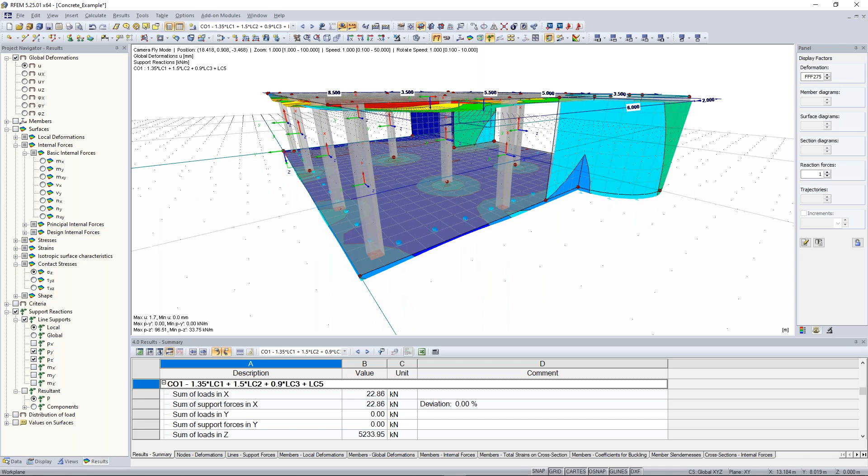When I press the plus button, the camera flies a little bit faster, minus button slower. With the arrows on the keyboard, I control this thing here, and yeah, so much to that. Pretty nice. Good.

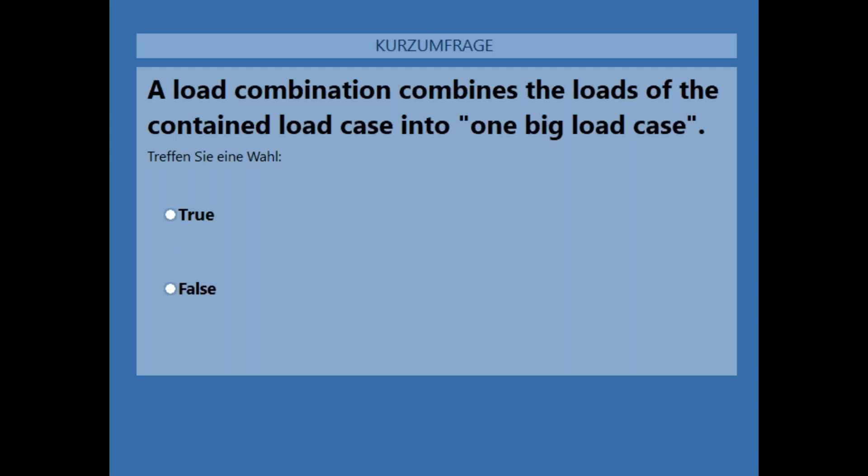Okay, now I will close this poll and show you the results. So load combinations combine all load cases under the consideration of the partial and combination factors into one bigger load case. Okay, so we are done.

I hope you enjoyed the training. I hope you learned something too, and we are really looking forward to the 3rd training. So please sign up for the 3rd training, and we would be very happy to see you there for the 3rd time, and also for the last time.